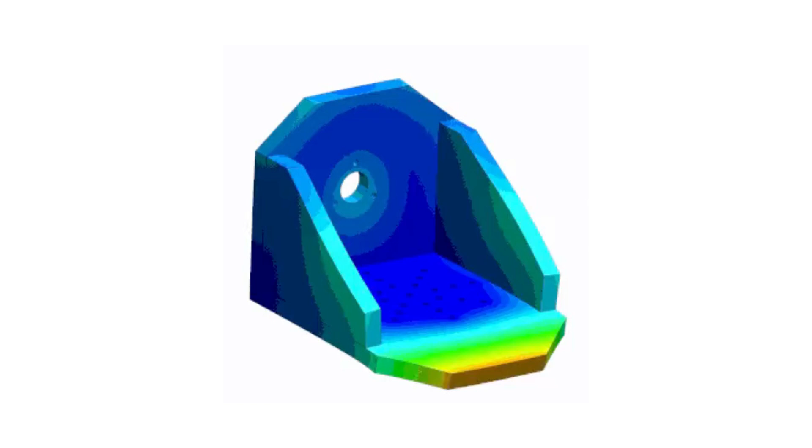You learned simulation. Maybe you used COMSOL, ANSYS, or Abaqus, but no one really tells you what comes next. Can you actually build a career from it? Could it actually make you money? In this video, I'll show you 4 career paths you can take with simulation, and the approximate salary range for each one. So let's get started.

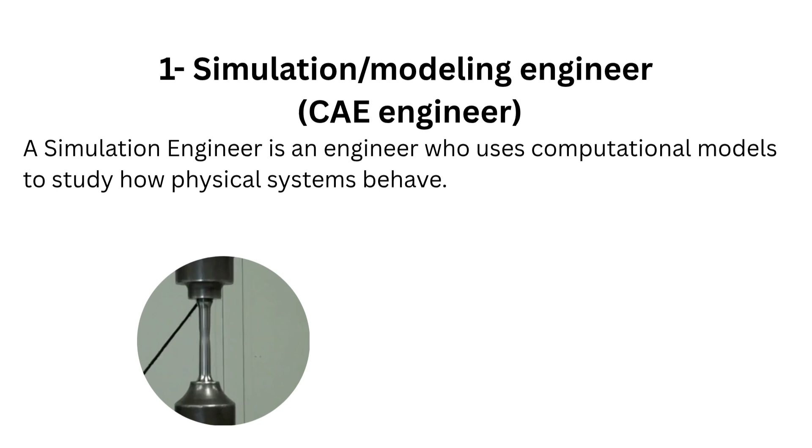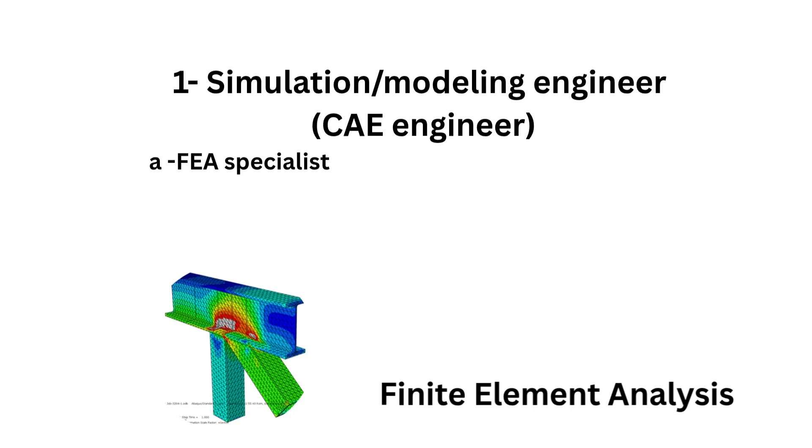The first path is a simulation engineer, which is an engineer who uses computational models to study how physical systems behave. They replace expensive physical experiments with virtual experiments inside a computer. This is mainly an industrial role. You can be an FEA specialist, specializing in finite element analysis. This role also greatly overlaps with structural analysis, focusing on stresses, deformation, fatigue studies, and structural mechanics.

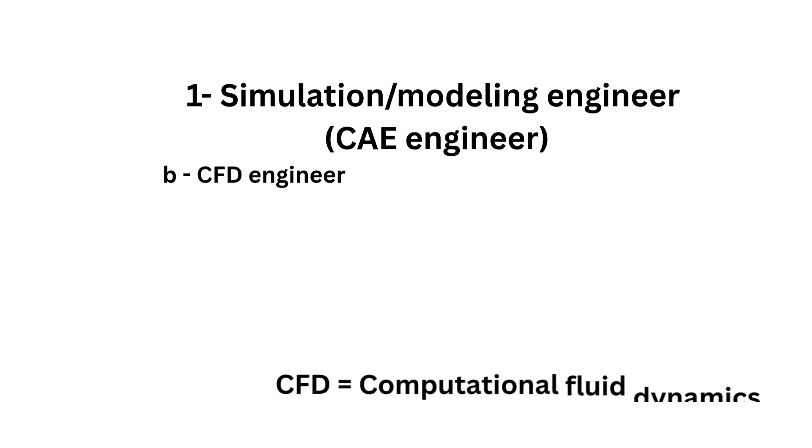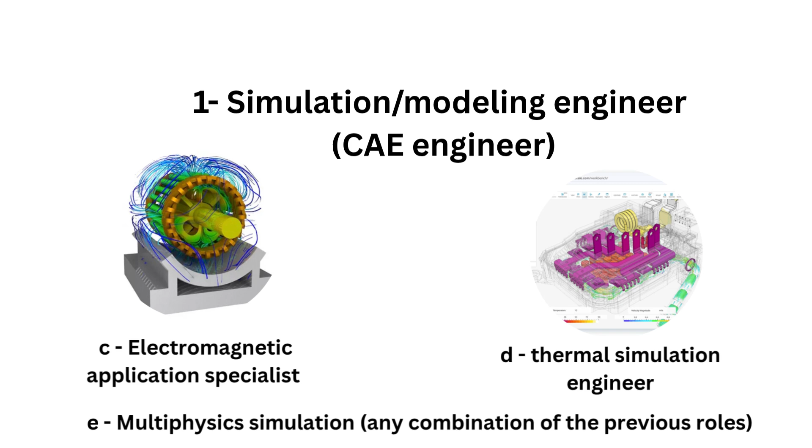You can also be a CFD engineer, or computational fluid dynamics, specializing in fluid studies. This is one of the popular paths and specialties in simulation. You can also be an electromagnetic simulation engineer, a thermal simulation engineer, or a multiphysics engineer. So basically you specialize in a specific physical phenomena and work for a company to build a specific product. You will also hear about a CAE engineer, which stands for computer-aided engineering. In many companies, CAE engineer and simulation engineer mean almost the same thing. The difference is mostly context.

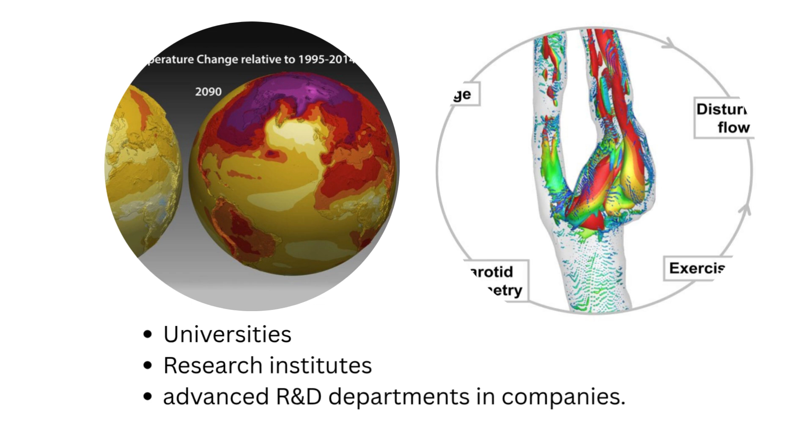A research scientist in simulation uses computational models to discover new knowledge, not just design products. While simulation engineers usually optimize existing systems, research scientists often simulate things that are not fully understood yet. This work usually takes place in universities, research institutions, advanced R&D departments in companies. Examples include simulating blood flow in arteries, or simulating climate change on Earth, or discovering a new numerical method, like improving upon existing methods, or new methods like meshless methods, peridynamics, or making faster solvers for PDEs or AI-assisted simulation.

For the salary, research scientists can earn anywhere from 19,000 to over 200,000, depending on the field and industry. In academia, salaries grow slowly, but in industrial research, especially overlapping with AI, they can grow extremely fast.

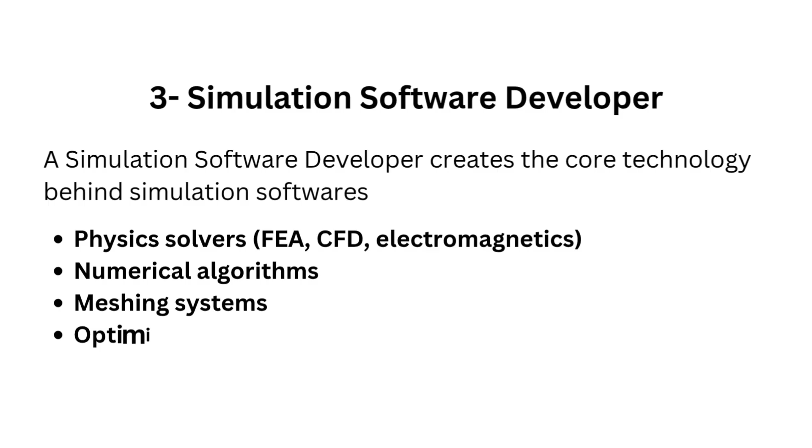The third path you can take is a simulation software developer. This is one of the most elite paths in simulation, and instead of using tools like COMSOL or ANSYS, you become the person who builds them. A simulation software developer creates the core technology behind simulation, like physics solvers, finite element, CFD, electromagnetics, numerical algorithms, meshing systems, optimization tools, or HPC systems (high-performance computing). This path is more technical than all the others. You need to be skilled with programming, mathematics, and the main physics in question. You can expect the salary to be higher than the previous fields because this is more specialized work.

The fourth path you can take is being a consultant or freelancer. And here's where it gets really powerful. You don't need a company, you can work independently. You can look for projects online and get paid for each. Moreover, some engineers become certified consultants, for example officially listed on the COMSOL platform, where there are multiple consultants for each country. The salary for this one highly varies because it depends on the country and your work.

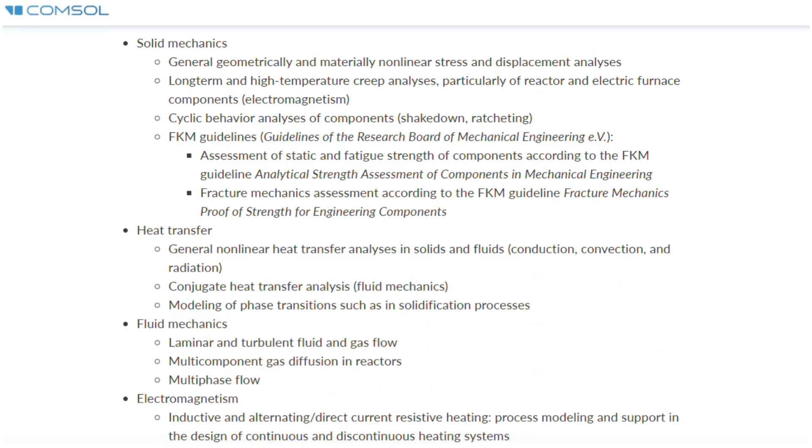So at the end of the video, I want to thank you for watching and also remind you that simulation isn't just a tool, it's a gateway to research, industry, and even your own business. So tell me in the comments, which path will you take?